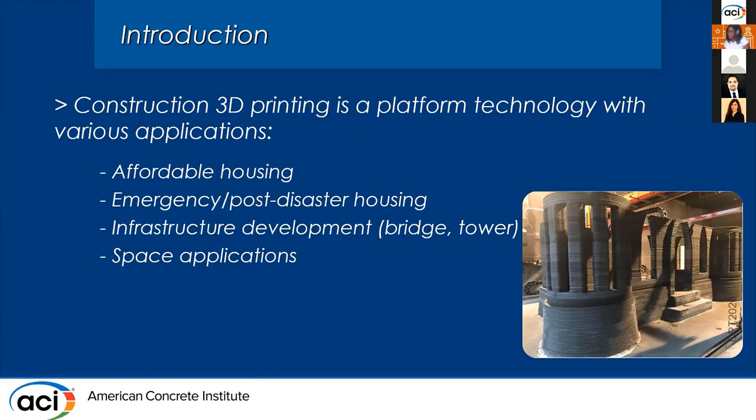The topic of my presentation is real-time extrusion quality monitoring techniques for construction 3D printing. I think by now we all know about different applications for this technology: low-income housing, emergency construction of shelters and houses after a natural disaster, demonstration projects for 3D printing of bridges or towers, and of course space applications, which the previous presentation was all about.

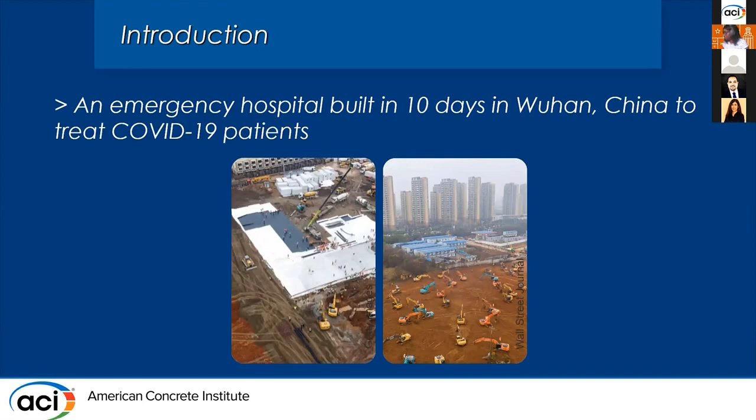I want to highlight the value of having an automated construction technology in these unusual times. You might have heard about the emergency hospital built in China in just 10 days for coronavirus patients. This would be a perfect scenario for using an automated construction technology such as construction 3D printing. There's definitely a significant need for a fast, reliable, and efficient technology like this, but there are a lot of technical and regulatory challenges that have to be solved first.

Later today, Dr. Mahmoud Ekenal is going to talk about AC509 and the major advancement with respect to building code compliance of 3D printed houses. But in terms of the process itself, I think robustness and quality control is a key element which is going to determine the success of this technology.

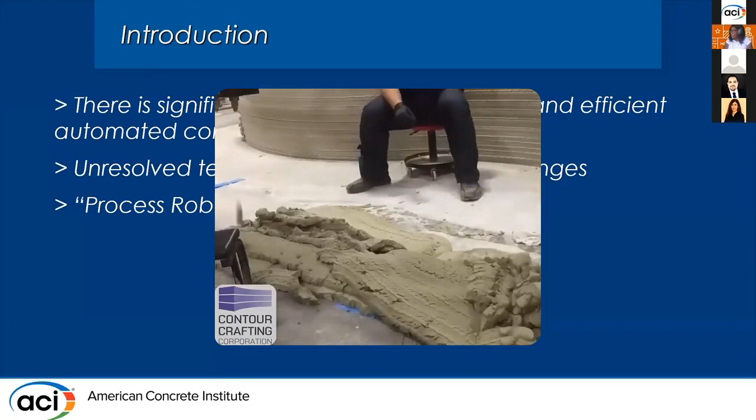I think this short video is going to help make my point. You can see a freshly printed wall which collapses, and you can see actually me sitting right there, a few years younger, learning a lesson from this failure. Just imagine in the middle of printing a house, half of the height of the walls are printed, and then suddenly something like that happens. That would be a disaster in terms of waste of material, time, and resources.

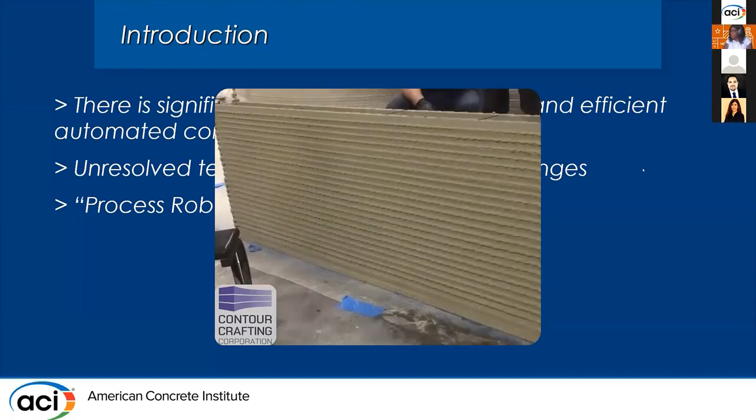That's why I think quality control is very important, and it needs to be addressed like any other fabrication process. But in construction, the product is a house, which is very big and also very important because people are going to live in these houses. So the quality of the product is very important.

In conventional construction, the on-site quality control for fresh concrete is usually simple and basic, which is okay because the requirements don't need much more. We are casting a large amount of fresh concrete in a short time, and as long as the structural and durability requirements are met with the hardened concrete later, we are fine. We are not concerned with fresh concrete that much.

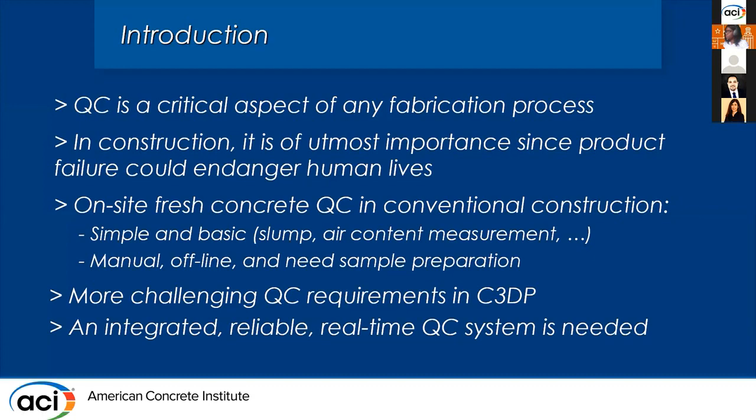But it's a different story when dealing with construction 3D printing. There are more challenging requirements in terms of fresh concrete, and that's why I think we need an integrated, reliable, real-time quality monitoring system for construction 3D printing. Part of my PhD work was focused on developing real-time extrusion quality monitoring techniques in order to detect variations in the printing material.

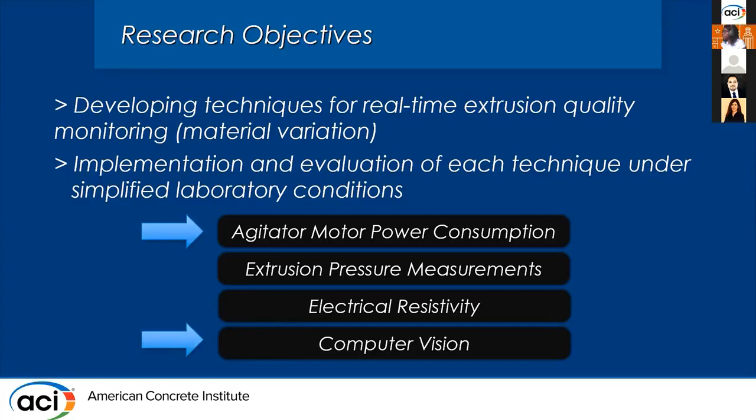Of course, there are other aspects like failure in hardware components, software, and everything, but my work was focused on material variations. The idea was to implement these ideas and evaluate each under simplified laboratory conditions. There were 4 techniques which I designed and studied in my work, but today, because of limited time, I'm going to go through 2 of them: power consumption measurements for the agitator motor, and using computer vision for real-time extrusion quality monitoring.

In terms of material variations, I think one of the most common issues is the variation in the free water of the printing material. In conventional construction we also have this problem because accurate measurement of moisture content in aggregates, especially sand, is not really easy.

So I selected that as the source of variation, and designed 6 levels of variations that you can see in the table. I have a reference mixture, which I called QC-ref, based on a previous study I did in 2017 with respect to performance-based testing of fresh concrete in construction 3D printing.

I intentionally changed the amount of free water in this mixture by plus or minus 5, 10, and 15 liters of water per cubic meter of concrete. Plus or minus 10 is usually the number used for variations in conventional construction; for example, for self-compacting concrete we usually use plus or minus 10 as the variation we should be able to deal with. So I added 5 and 15 so that I could get a good idea of the performance of each technique against different levels of variation.

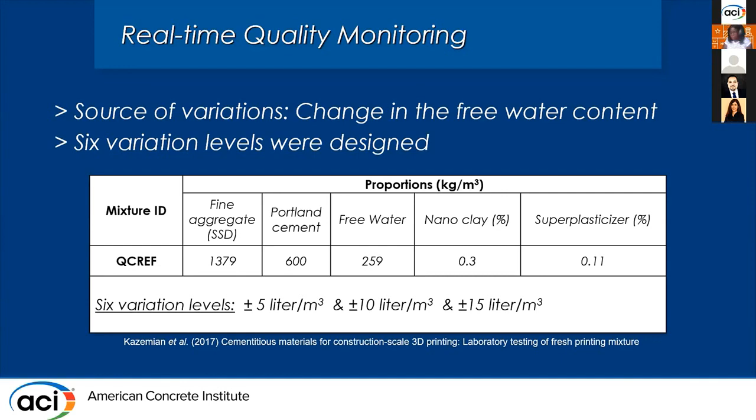As I said, the first technique is based on continuous power consumption measurements of the agitator motor. This idea can be described as embedding an inline viscometer or torque meter in the wet material circuit flow. At least when I started, there was no other data or implementation of this technique.

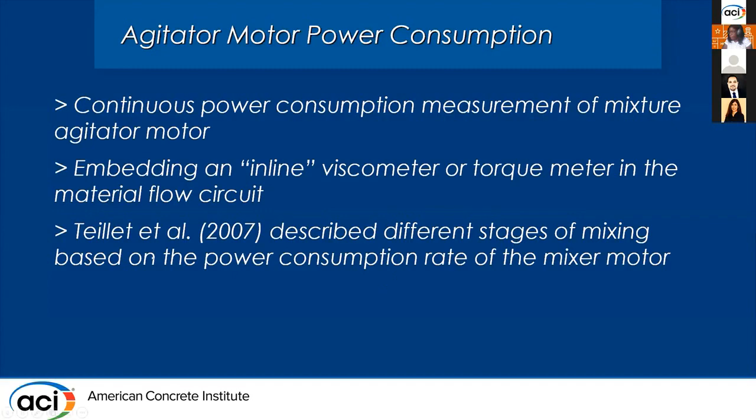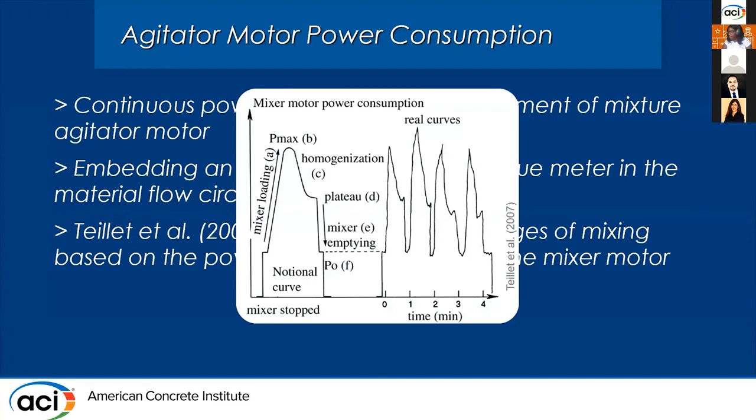But in other areas of concrete technology, something similar was done. In 2007, a researcher measured the power consumption rate of a concrete mixer motor and used that to describe various stages of concrete mixing, developing a graph like this to show power consumption evolution at different stages.

So to implement this idea for construction 3D printing, I designed agitator blades and 3D printed them using ABS plastic. The design was inspired by commercial continuous mixers and their blades, but the functionality is really more like the paddles of a viscometer you might have seen in the lab. I installed five of these blades on a shaft connected to a DC motor.

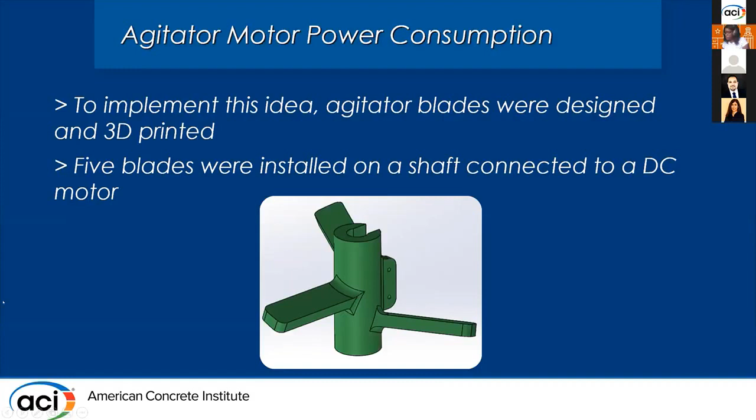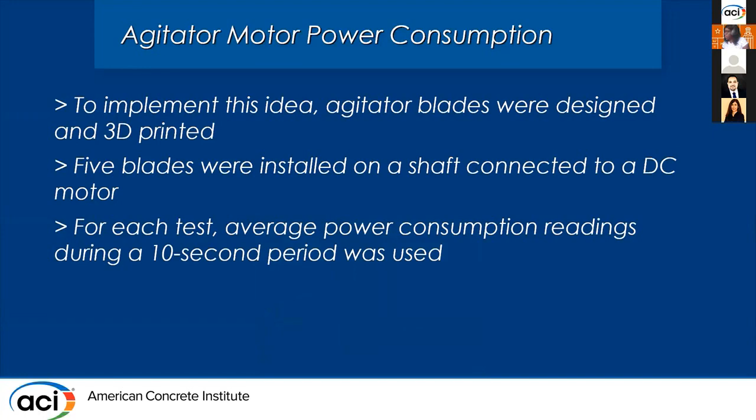For each test, I used the average of the readings during a 10-second period, and I repeated the experiment for each variation level four times, using the average as the result of that test for a specific variation level. Here you can see the results.

The standard deviation was in the range of 1.6 to 4.4 watts. As a general trend, as the amount of water in the mixture increased, the power consumption of the motor went down, which makes sense because the viscosity of the printing material decreases with increasing water content.

Other than that general trend, in the range of -5 to +10 liters per cubic meter, we cannot really see any change. We cannot see any statistically meaningful change in the extruder power consumption.

So basically this technique is not able to differentiate between these four levels of water content in the printing material. Another observation was that at the lower levels of water content, like -10 and -15, we had a larger, bigger change in the power consumption.

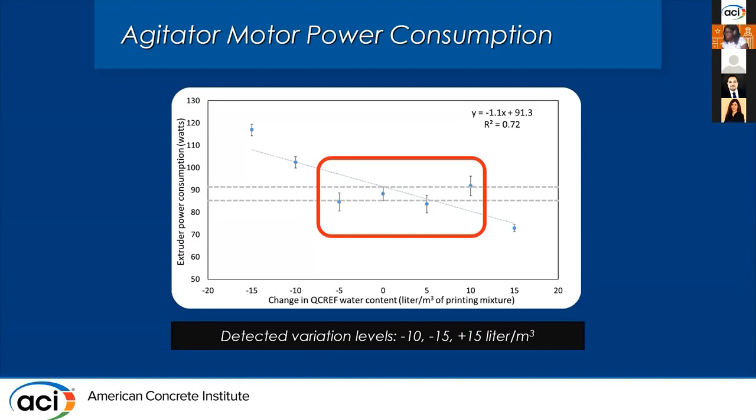There was more response in the power consumption when we had more viscous printing material, compared to +10 and +15 liters per cubic meter. So the system was more responsive with lower amounts of water and more viscous mixtures in the hopper agitator system. Based on that, the variation levels detected by this technique were -10, -15, and +15 liters per cubic meter.

The second technique was using computer vision, which you might be familiar with. It is used as a tool for automated construction monitoring, for example for tracking construction machinery and materials on construction sites.

Here, the idea was based on the observation that changes in the properties of the printing material result in over-extrusion or under-extrusion conditions. For example, at a fixed printing speed, reducing the viscosity of the material can result in a wider layer and over-extrusion. Based on that, we wanted a vision system able to measure the width of the layer in real time to detect material variations.

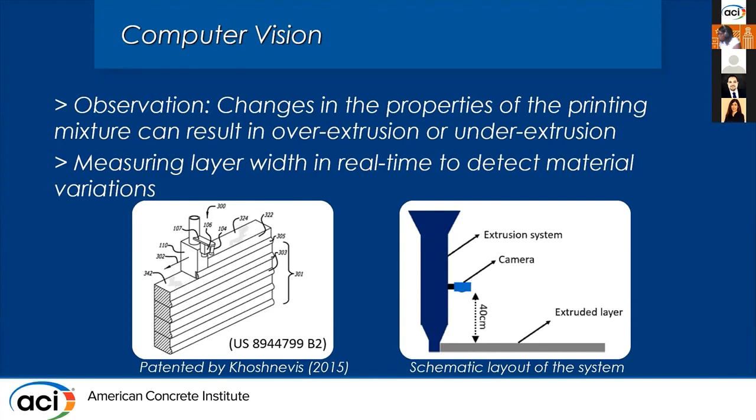I should say that this whole idea of using computer vision during the construction 3D printing process was patented by Dr. Khoshnevis, shown on the left side. The picture on the right shows the configuration we designed for these experiments, having a camera at a fixed distance from the extruded layer, then using the extrusion videos and analyzing them using a single board computer called Raspberry Pi and the OpenCV library, a set of real-time computer vision functions developed by Intel.

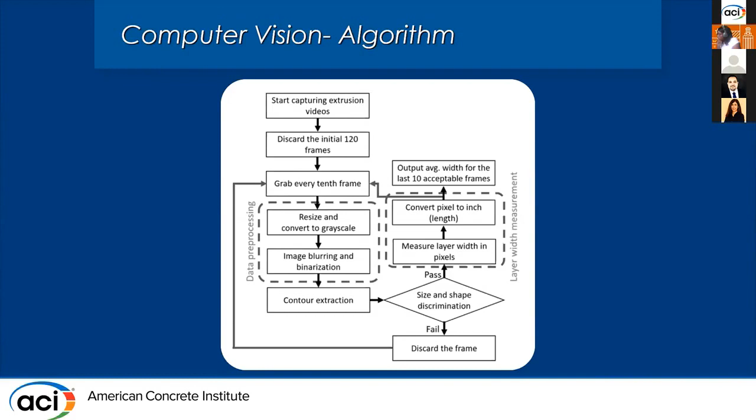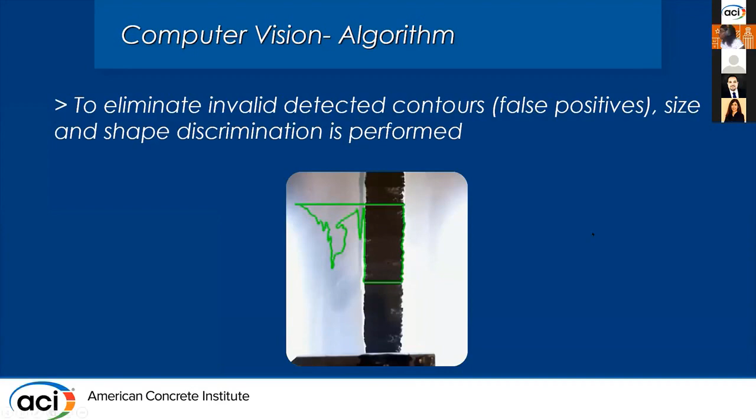After all the pre-processing of every video frame, all the contours are extracted in an image, and sometimes we have some invalid contours. To eliminate those, I applied size and shape discrimination techniques using parameters such as contour extent and contour area, as you can see here. So a video frame like this would be automatically disregarded by the algorithm.

In terms of calibration, I wanted to first have a reference layer with accurate dimensions. So instead of printing the layer, I printed a mold, and used self-leveling concrete to cast a layer with exact dimensions of 1.5 inch width and 1 inch height, then used my vision system to measure the width of that layer. It was consistently measured at 63 pixels, which gave me a pixel per inch ratio of 42.

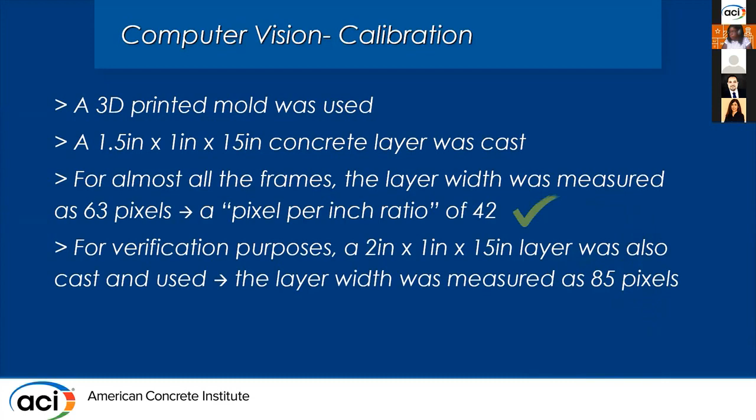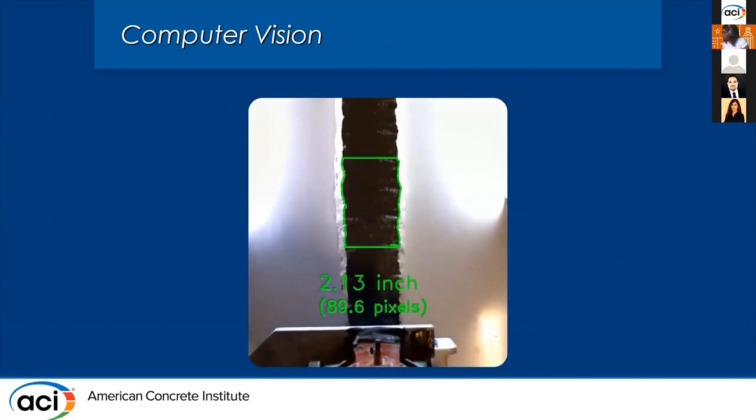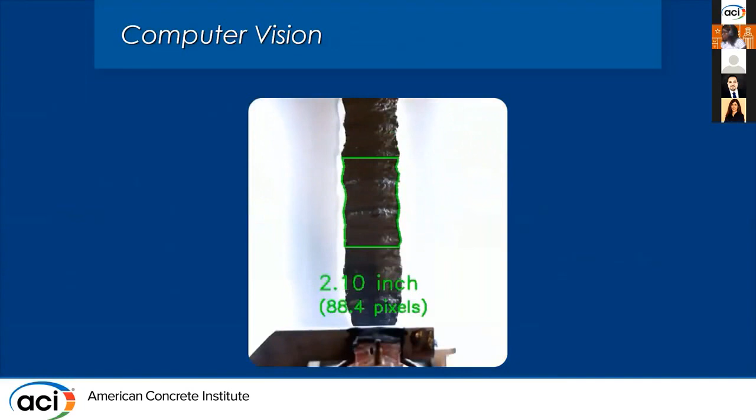Here is a demonstration of the system for a case of over extrusion. The target width of the layer was 1.5 inch, but because of the over extrusion, the layer width was more than that. As you can see, the system can measure that in real time and report the width of the layer.

These are the actual variations for the main experiments. The reference, QCref, as I said, was designed for 1.5 inch width, so it was around 38 to 39 millimeters based on the design. Then different amounts of water were used, which affects the width of the layer.

If you see the variations and the average width for 4 layers for each experiment, at each variation level, even the lowest ones, we are able to see a significant change in the width of the layer, and there is no overlap. So basically we can see a meaningful change in the layer width as a result of changing the water content.

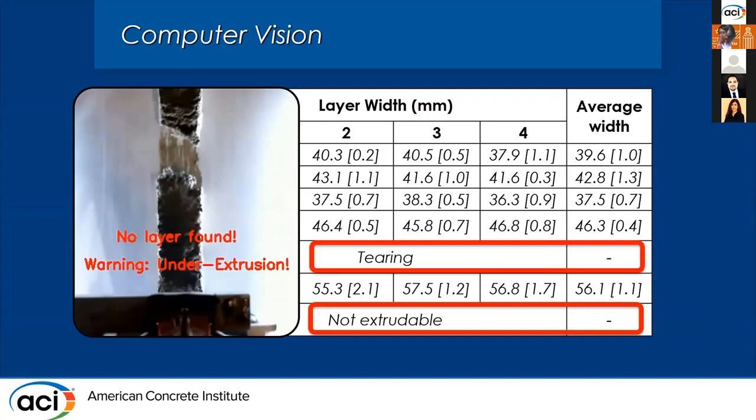In 2 cases, because of the low amount of water, we couldn't extrude a continuous layer, so I could see tearing or even zero deposition for those mixtures. In those cases, the system was able to detect that as under extrusion. It couldn't differentiate between tearing and zero deposition, but it would report both as under extrusion. So it was detected for both cases. We can say that for all 6 variation levels that I designed, the technique based on computer vision was able to detect those variation levels.

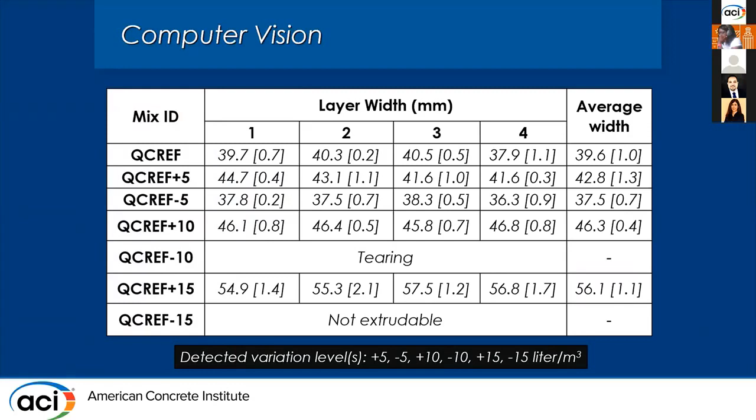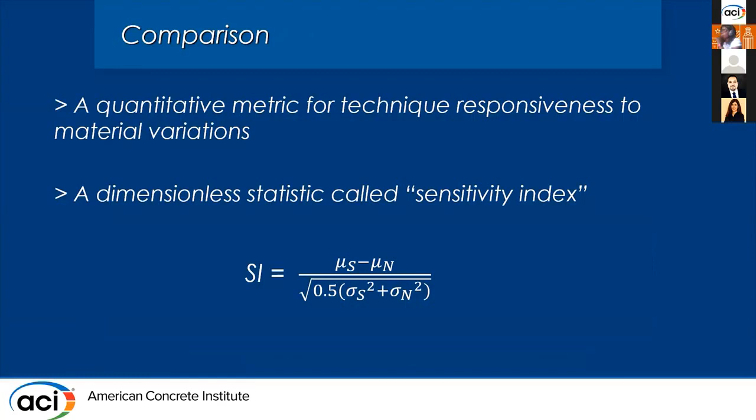To quantify the responsiveness of each technique against material variations, I used a sensitivity index, which is usually used in other areas to provide the separation between the means of signal and noise distributions compared to the standard deviations of signal and noise distributions.

Of course, as the variation level goes higher from 5 to 15, the value of the sensitivity index goes higher, which means even better and easier detection of the variation level.

For the power consumption technique, for 3 of the variation levels, plus/minus 5 and plus 10 liter per cubic meter, it was not able to detect the variation in the printing material, but for the higher levels, it could easily detect it with very high sensitivity indexes.

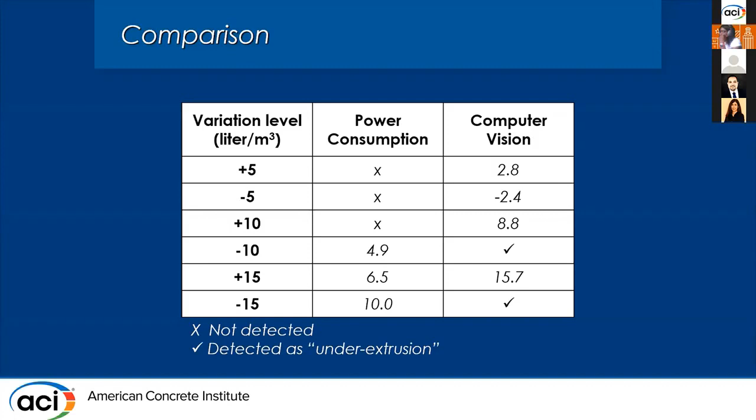In general, I could say that the technique based on computer vision had better performance, high accuracy, and very high sensitivity and responsiveness to variations in the material viscosity. One reason that comes to my mind is that this technique is based on direct measurement of the properties of the system output, rather than relying on a correlation between the viscosity of the material, for example, and printability or other properties.